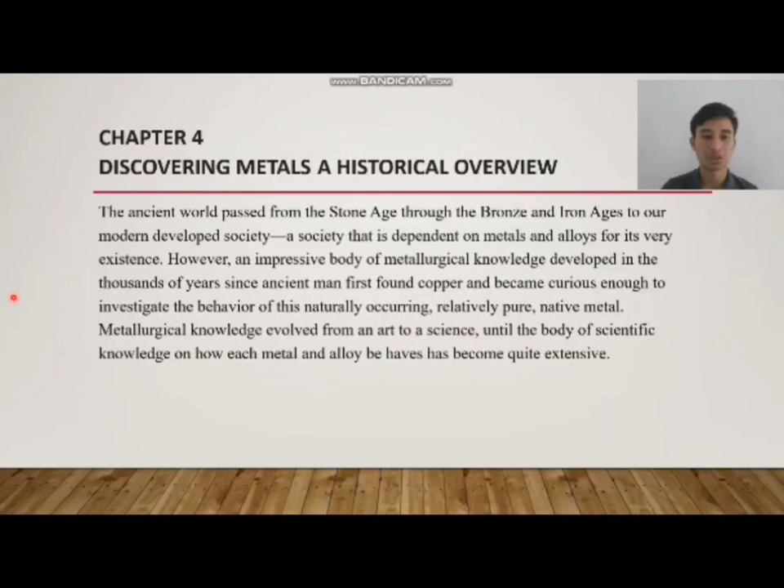However, an impressive body of metallurgical knowledge developed in the thousands of years since ancient man first found copper and became curious enough to investigate the behavior of this naturally occurring, relatively pure native metal. Metallurgical knowledge evolved from an art to a science until the body of scientific knowledge on how each metal and alloy behaves has become quite extensive. Next.

4.1 Native metals. Most natural metals are in the form of minerals or compounds that have reacted with other metals or non-metal atoms. Metallurgists extract metals from compounds, except that some metals occur as pure metals. Metallurgy developed through the use of these pure metals.

The Chalcolithic period before the Bronze Age, estimated 5000 to 3000 BC, marked the mastery of metals. Initially, gold, silver, and copper were used for decorative purposes due to their low strength. However, the Copper Age paved the way for practical metallurgy. Copper, like gold and silver, was found naturally and used for ornaments and decorative purposes.

Ancient civilizations in Egypt and the Middle East discovered that hammering copper made it stronger. They used this technology to create usable tools and knives for agriculture and fishing. However, copper knives lacked strength for combat around 4000 to 3000 BC.

They learned to extract copper from bluestones and minerals, expanding their sources. The development of high temperatures to melt copper also expanded the amount of material available. Large pieces of copper could not be cut and therefore were not of significant importance until melting techniques became available.

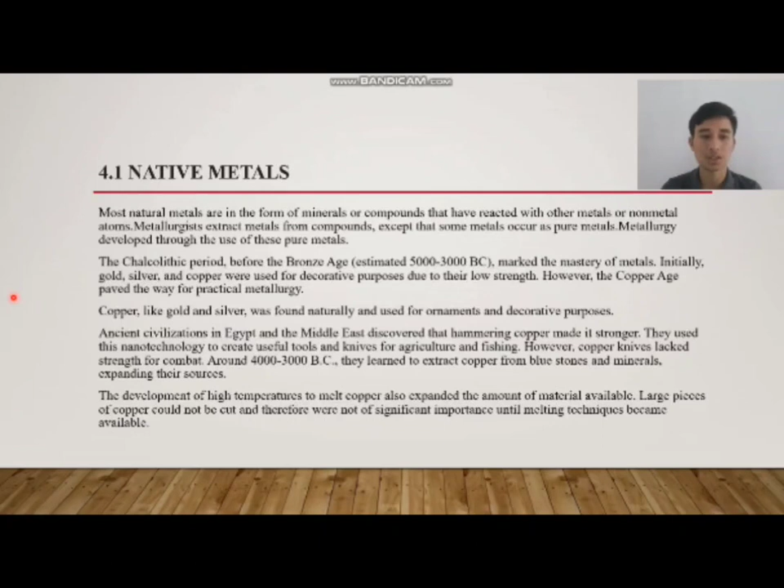4.2 The Bronze Age. The Bronze Age started with the discovery that combining metals created stronger alloys. Tin strengthened copper in the Middle East. Bronze alloy contains 87% copper, 10 to 11% tin, and trace amounts of other elements. Within 4000 to 5000 years, the Bronze Age emerged.

Sterling silver was developed by adding copper to silver. The addition of 7.5% copper increases the strength of silver without changing its appearance. Practice of ancient metallurgy persists into modern times, with bronze consisting of 88% copper and 12% tin. Similar to ancient bronze, increased tin content leads to hardened gun metal with 88% copper.

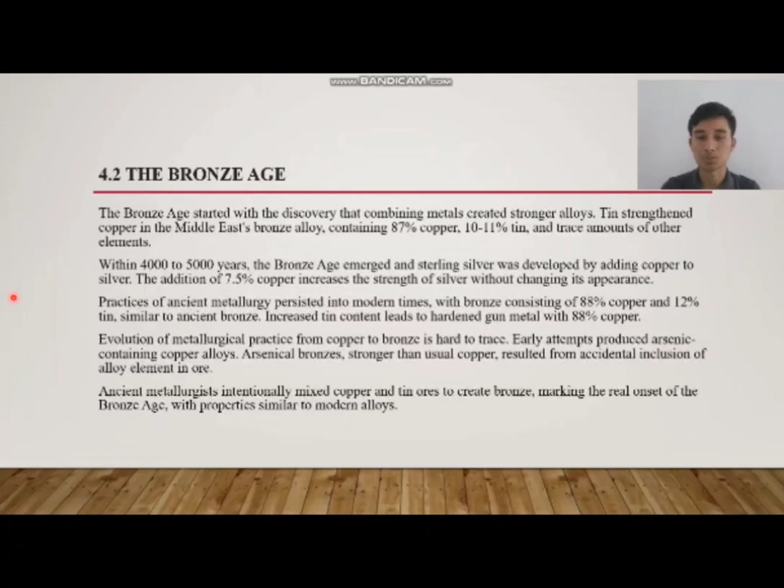Evolution of metallurgical practice from copper to bronze is hard to trace. Early attempts produced arsenic-containing copper alloys. Arsenical bronze, stronger than usual copper, resulted from accidental inclusion of alloy elements in ore. Ancient metallurgists intentionally mixed copper and tin ores to create bronze, marking the real onset of the Bronze Age with properties similar to modern alloys.

Next, bronze, stronger than pure copper, was used as both a tool and a weapon. Picture 4.1 shows a photograph of an ancient bronze casting, Chinese foundry technology in the 7th century BC. It has less tin than typical bronze weapons.

Low-tin bronze was made, due to scarcity of tin and more abundant copper-rich ores, unalloyed copper was used when possible. Bronze was expensive and transportation of tin was difficult. The shortage of tin made it a crucial material during the Bronze Age. Next,

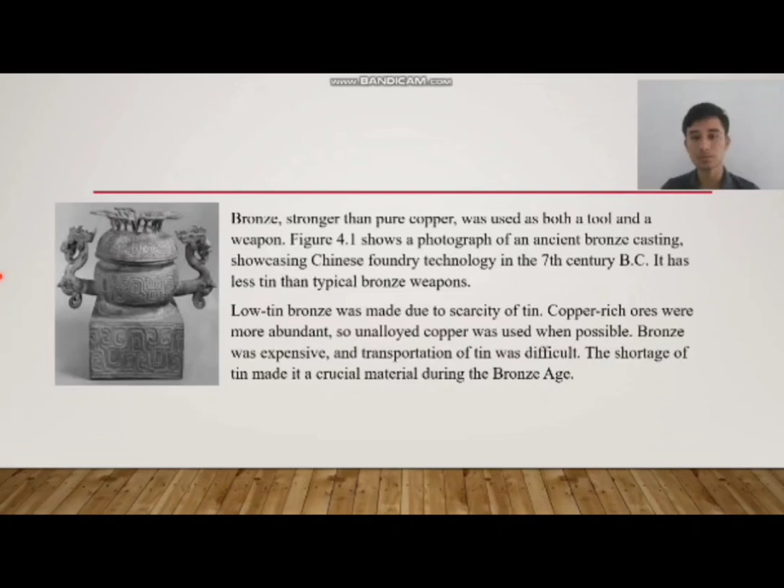4.3 Making metals. Extractive practice. Table 4.2, common occurrence of metals. Most metallic elements occur naturally as minerals or ores, which are compounds that result from a reaction between metallic and non-metallic atoms. Common native and mineral occurrences of metals are listed in table 4.2. Most copper, zinc, and lead ores are sulfides, while iron and aluminum are generally found in oxide ores.

Minerals are often colorful and attractive, leading ancient and modern humans to collect samples. A common copper sulfide mineral, bornite, turns iridescent blue or blue-green when exposed to air due to a chemical reaction with oxygen. Other copper ores include chalcopyrite, yellow, and covellite, deep blue.

Metals are extracted from ores by separating them from sulfur or oxygen, which requires energy. This can be done by heating mineral samples, accidentally causing copper metal production, or intentionally casting stones into a fire during worship and discovering transformed copper. Next,

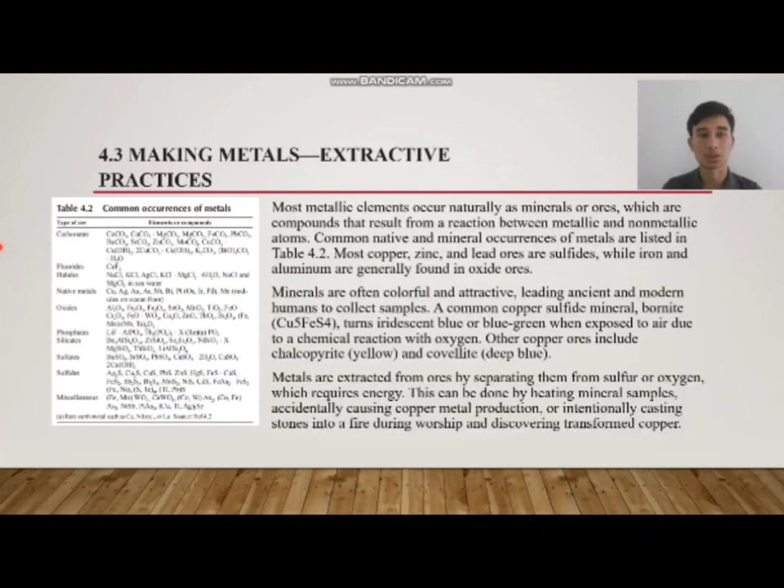pyrometallurgy extracts metals from ores using chemical reactions at high temperatures, involving processes like roasting and smelting. Other methods include hydrometallurgy and electrometallurgy.

Hydrometallurgy uses acidic or alkaline solutions, while electrometallurgy uses electrical energy for extraction. Copper smelting began in the Chalcolithic period after the discovery of melting copper. As native copper and sulfide ores deplete, metallurgists extract copper from other deposits. This led to the discovery of alloying and the Bronze Age.

Extraction processes are complex, but smelting can be simple. Early settlers used galena ore to produce lead for bullets by roasting it in a tree-stump fire. Although extraction of lead from galena has been common for many years, it has only recently been recognized that silver is associated with the extraction of lead from galena. Lead sulfide ores generally contain significant amounts of silver. Because of the potential for silver recovery, lead smelting is currently carried out under controlled conditions.

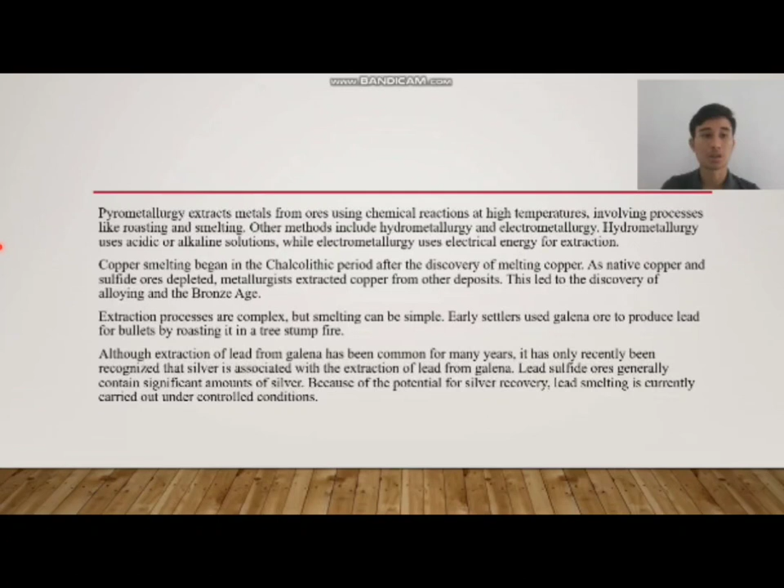This picture is Picture 4.2. A schematic of a lead blast furnace is shown in Picture 4.2. Pyrometallurgical extraction is a process of furnace heating in a controlled environment to produce the desired metal and undesirable products. Poisonous hydrogen sulfide gas is produced during lead smelting due to the reaction with oxygen in the air. Next,

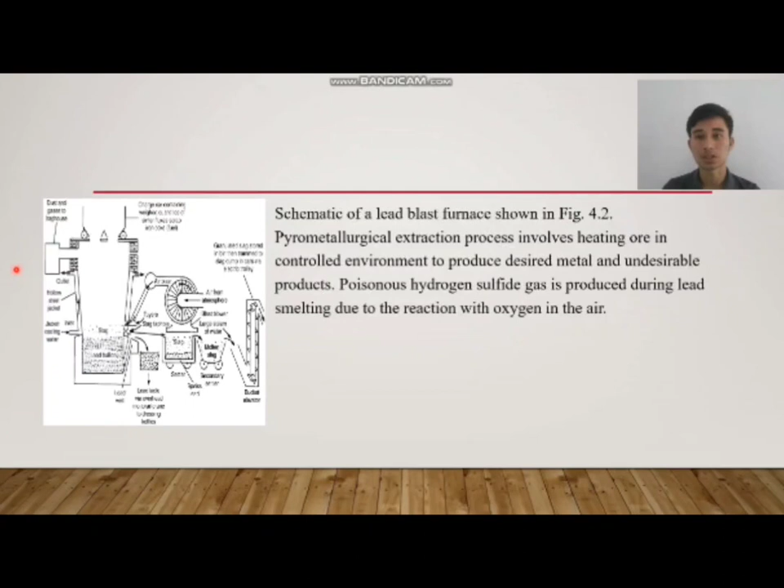4.4 Iron. The early name for iron means stone from heaven in several languages. This name probably resulted because the first iron used by ancient man was literally from heaven. Meteorites weighing from a few ounces to tens of tons have been falling on the earth since its beginning. The first iron was likely obtained from naturally occurring iron oxide deposits when primitive man put fire at iron-rich cliffs, resulting in iron sponge for tool fabrication.

The first iron developed was wrought iron, which could be shaped easily using a hammer. Wrought iron contains a small amount of carbon, less than 0.05%, which makes it flexible. Iron with a content of 0.1 to 2.0 wt% C is called steel.

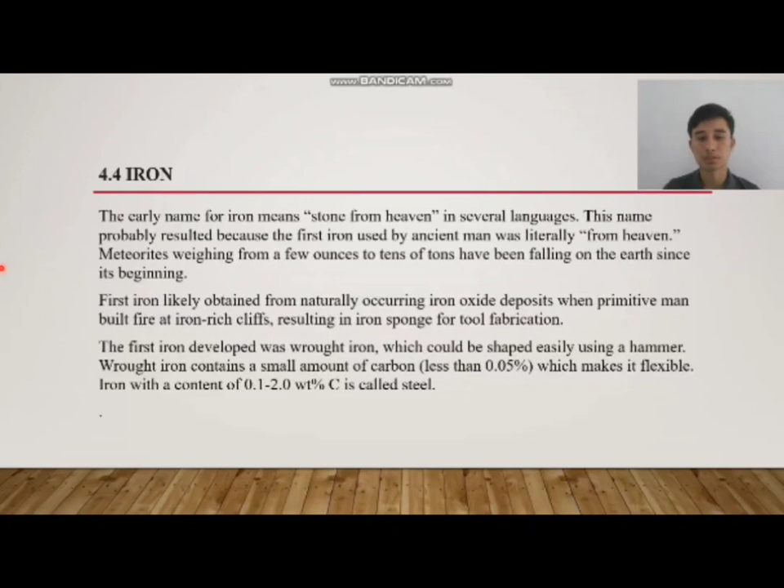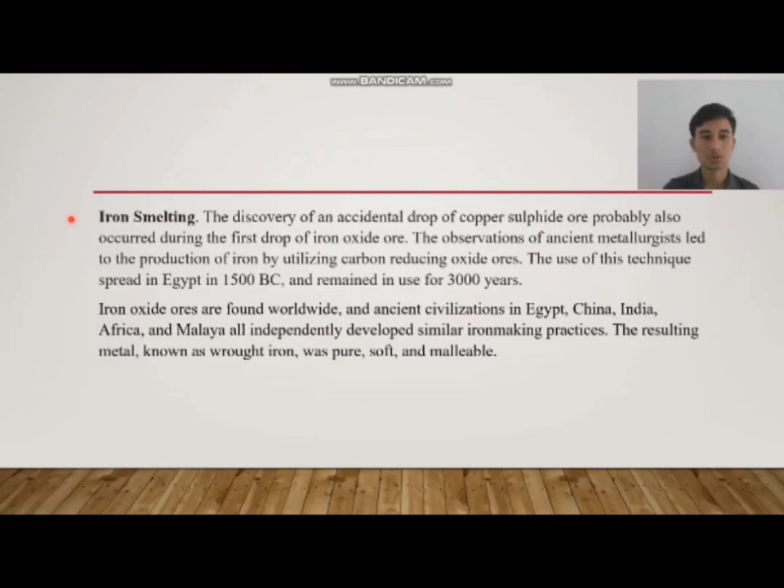Next, iron smelting. The discovery of an accidental drop of copper sulfide probably also occurred during the first drop of iron oxide ore. The observations of ancient metallurgists led to the production of iron by utilizing carbon to reduce oxide ores. The use of this technique spread in Egypt in 1500 BC and remained in use for 3000 years. Iron oxide ores are found worldwide, and ancient civilizations in Egypt, China, India, Africa, and Malaya all independently developed similar iron-making practices. The resulting metal, known as wrought iron, was pure, soft, and malleable.

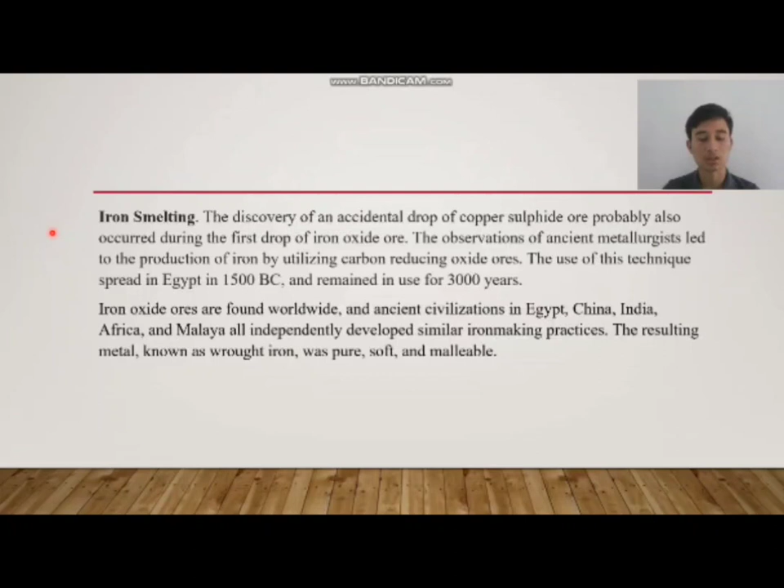Next, this is Picture 4.3. However, the carbon also serves as a reducing agent to free the iron from the iron oxide. The carbon reacts with the iron ore, forming carbon dioxide and iron. Early iron smelting operations were conducted in chimney furnaces, such as the one illustrated in Picture 4.3. These furnaces could easily have been developed after the first accidental reduction of iron oxide.

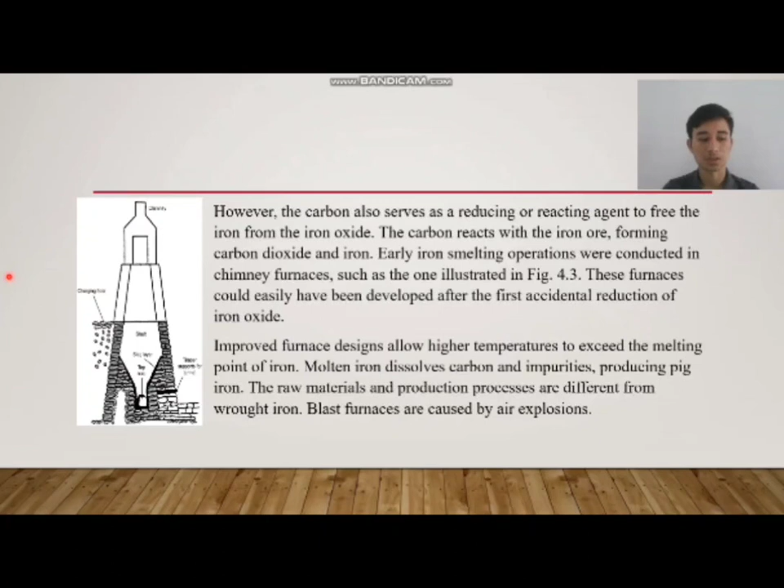Improved furnace designs allow higher temperatures to exceed the melting point of iron. Molten iron dissolves carbon and impurities, producing pig iron. The raw materials and production processes are different from wrought iron. Blast furnaces are named for the air blast. Next, this picture is Picture 4.4. The use of blast furnaces greatly increased the rate at which iron could be produced. A schematic of a blast furnace is shown in this picture.

In such a furnace, approximately 2 units of iron ore, 1 unit of coke, 1/2 unit of limestone, and 4 units of air for the blast are required for each unit of pig iron produced. The smelting process in a blast furnace begins when the charge of ore, coke, and limestone is loaded into the top. Temperatures in the blast furnace range from 150 to 200 degrees Celsius. Due to the hot carbon monoxide from the coke combustion, carbon monoxide reacts with iron ore, forming iron, carbon dioxide, and soot. Soot removal is a challenging problem in metal production.

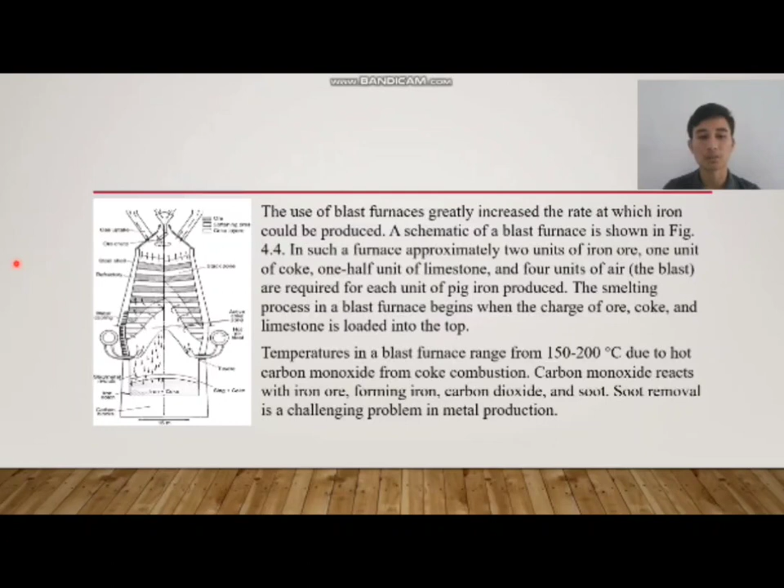Next, this picture is Picture 4.5. The control of production practice to produce high quality products without contamination of the environment is a relatively modern innovation. Environmental contamination was not considered a problem until recently. However, the production of soot was well known, as illustrated in Picture 4.5, which is a drawing of an early version of the blast furnace. This drawing appeared in Georgius Agricola's book De Re Metallica, which was prepared in 1556 and translated from Latin into English by Herbert Hoover and his wife Lou Henry Hoover.

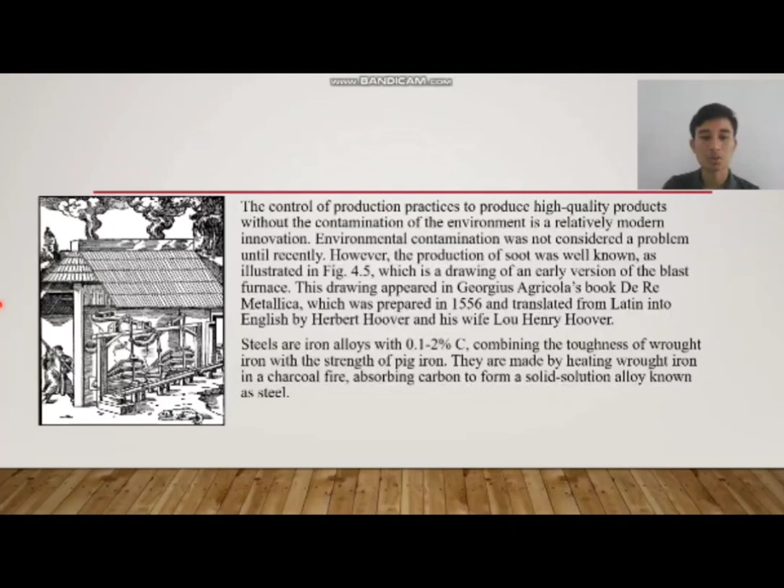Steels are iron alloys with 0.1 to 2% carbon, combining the toughness of wrought iron with the strength of pig iron. They are made by heating wrought iron in a charcoal fire, absorbing carbon to form a solid solution alloy known as steel.

Next, 4.5. Discovery of modern metals. Beryllium is added to copper to improve its strength. The copper beryllium alloys contain only a small amount of beryllium, approximately 2%, but can be processed or heat treated to be much stronger than any low tin brass or copper zinc alloy. These very high strength copper alloys are used for the production of springs in the electrical industry and to make non-sparking tools for use in potentially explosive atmospheres.

Next, cadmium. Cadmium, like zinc, protects nuts, bolts and other components made of high-strength steel from corrosion. Commercial aircraft components are often cadmium plated. Cadmium strengthens dental fillings, but efforts to find a safer alternative are underway due to environmental concerns.

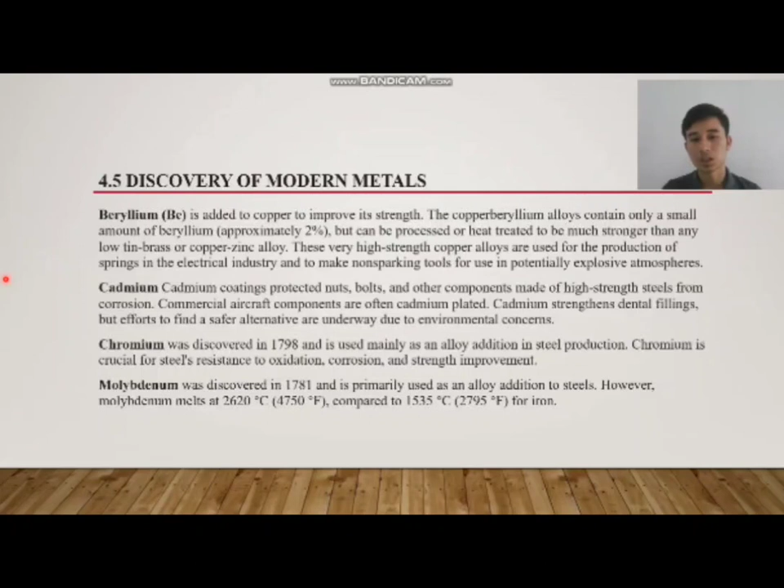Chromium was discovered in 1798 and used mainly as an alloy addition in steel production. Chromium is crucial for the steel's resistance to oxidation, corrosion, and strength improvement. Next, molybdenum was discovered in 1781 and is primarily used as an alloy addition to steel.

However, molybdenum melts at 2620 degrees Celsius or 4750 degrees Fahrenheit, compared to 1535 degrees Celsius or 2795 degrees Fahrenheit for iron.

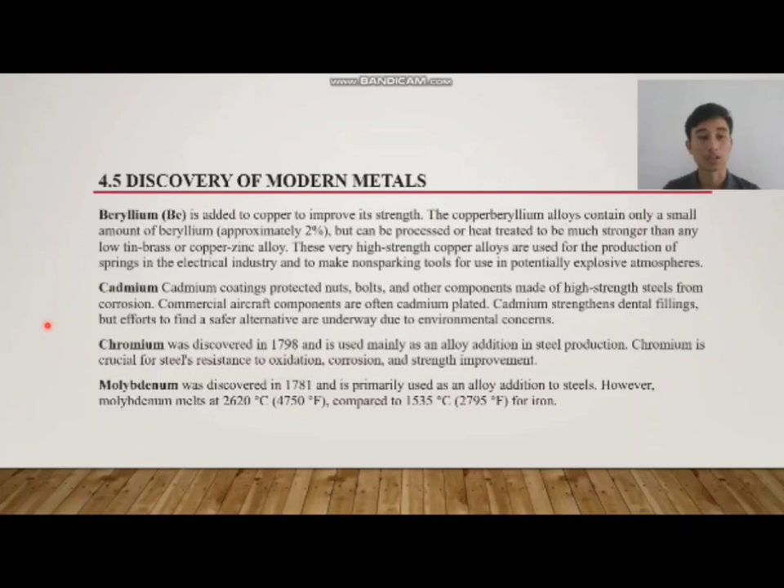And next, tungsten was first refined from ore in 1783 and was originally called wolframium. Tungsten was first used as the filament for the incandescent light bulb, and this use accounts for 15 to 20% of all tungsten use. Next, vanadium. Vanadium is among the hardest of all relatively pure metals. It was discovered in 1830 and is actually more abundant than copper, nickel, or zinc, but it's very difficult to

refine. Magnesium is the lightest of the widely used structural metals because of its low density. Magnesium has been used in aircraft frames. It is also an important alloying element in aluminum. Next, titanium was discovered about 1790, but because of the difficulty of freeing titanium from oxygen and nitrogen, it was not readily available as a structural material until the

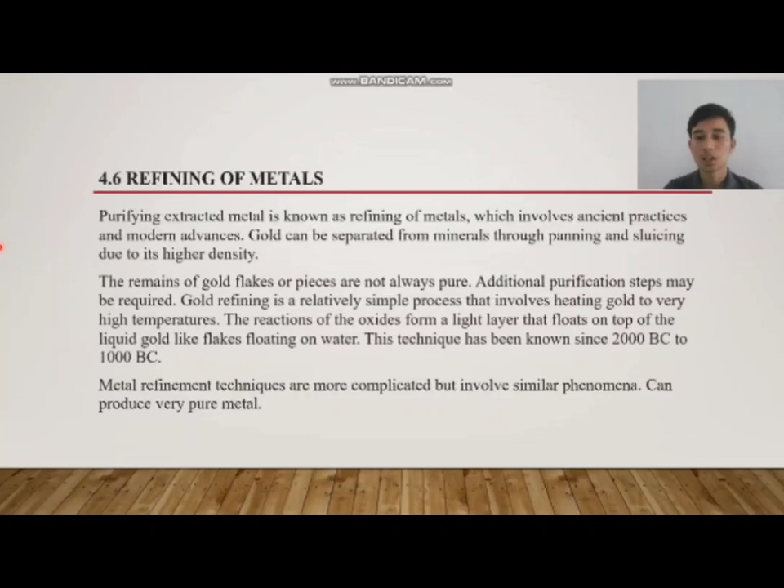Gold refining is a relatively simple process that involves heating gold to very high temperatures. The reaction of the oxides forms a light layer that floats on the top of liquid gold, like flakes floating on water. This technique has been known since between 2000 BC and 1000 BC. Metal refinement techniques are more complicated but involve similar phenomena, and can produce very pure metal.

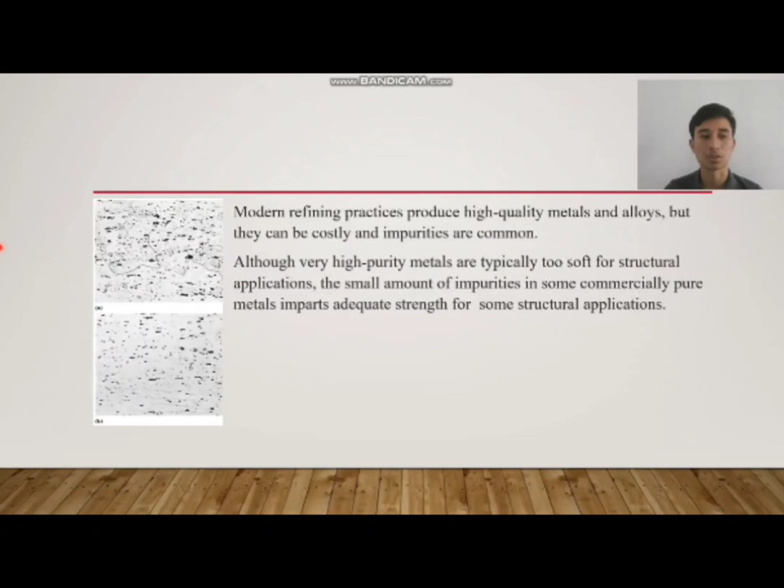Next, modern refining practices produce high quality metals and alloys, but they can be costly and impurities are common. Although very high purity metals are typically too soft for structural applications, the small amount of impurities in some commercially pure metals imparts adequate strength for some structural applications. Next, this picture is picture 4.8. For example, commercial heat exchangers for certain applications are made of commercially pure titanium.

Although titanium is characterized by a somewhat low thermal conductivity compared to that of other metals such as copper-based alloys, the major design factor in heat transfer relates to material thickness, corrosion resistance, and surface films, not just to the thermal conductivity of the metal. For these reasons, commercially pure titanium can have advantages over other metals in the design of heat exchangers. It offers good strength, resistance to erosion and corrosion, a very thin conductive oxide surface film, and a hard smooth surface that limits adhesion of foreign materials and promotes drop-wise condensation. Okay.